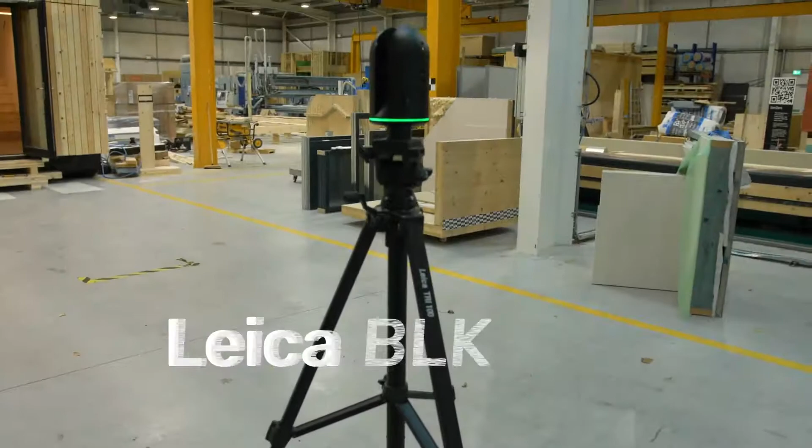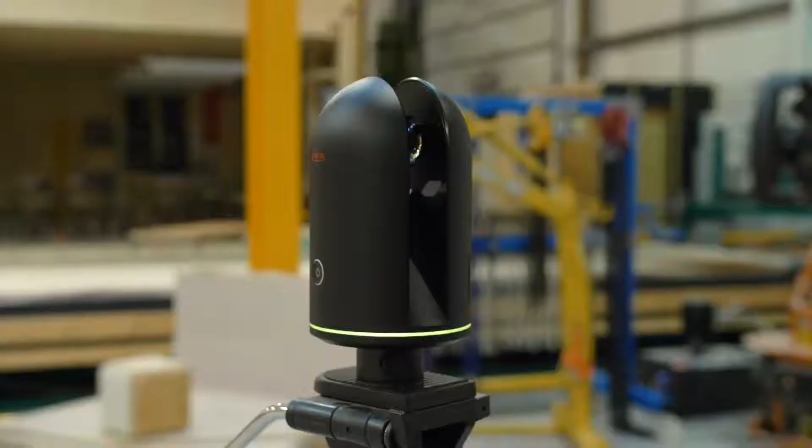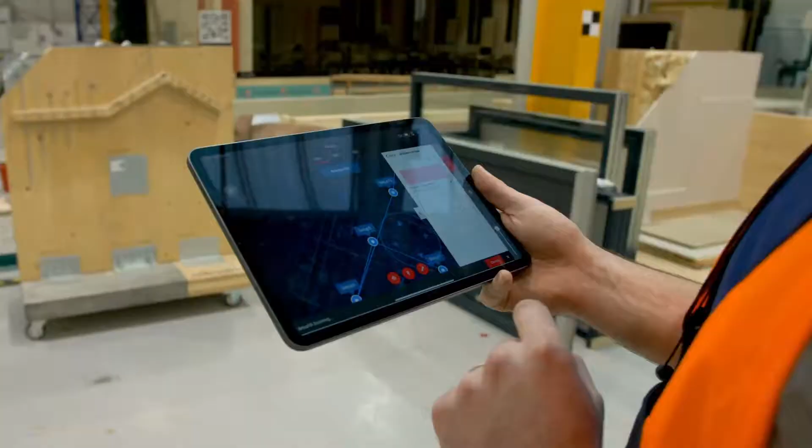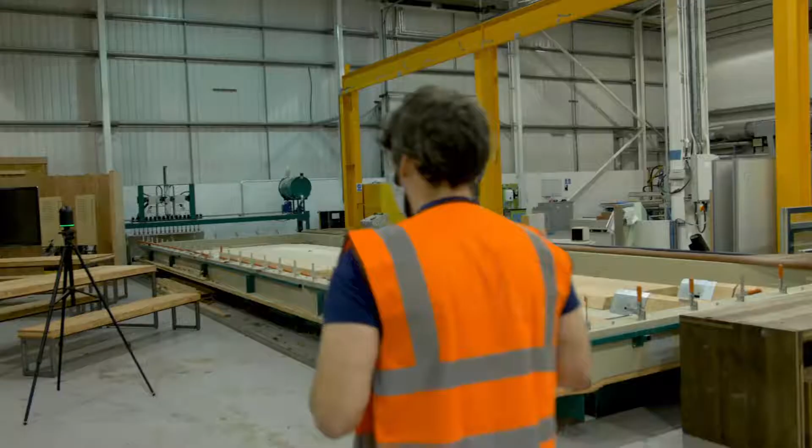The Leica BLK360 is a compact imaging laser scanner that uses a 360 laser distance meter and high-definition panoramic imaging to create a 3D point cloud of the space around it. LiDAR technology captures 360,000 points per second. 3 spherical panoramic HDR cameras with a thermal imaging camera deliver 3D point clouds with millimeter accuracy in minutes. A LiDAR scanner creates an accurate and detailed digital record of real-world space and objects. Combining this with BIM models and data, an accurate digital twin can be developed. 3D scans can be used to keep a record of in-progress work, mapping and overlaying changes as a job develops. The BLK360 is small, compact and easy to deploy on-site or in restricted spaces. Laser scanning improves quality and accuracy of site information. Scanning is also fast, efficient and cheaper than other forms of project mapping.

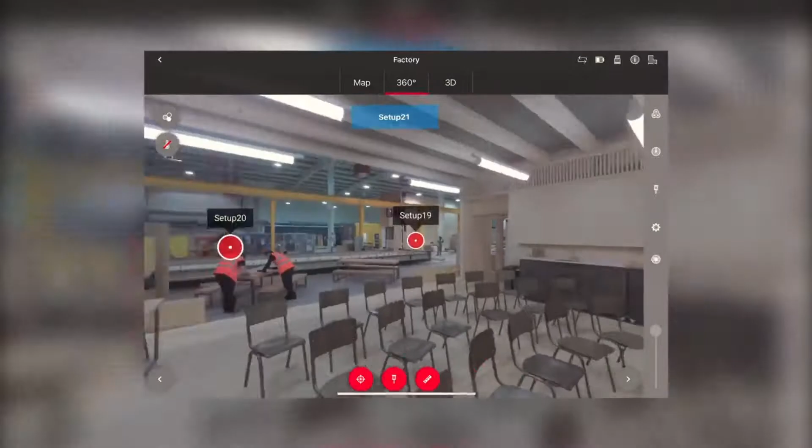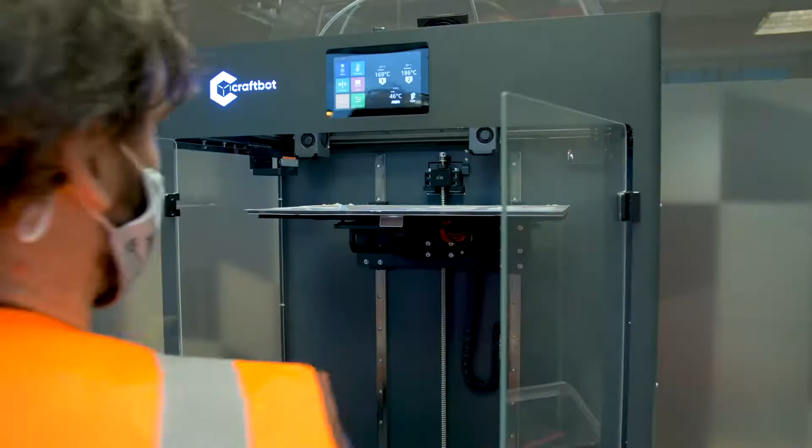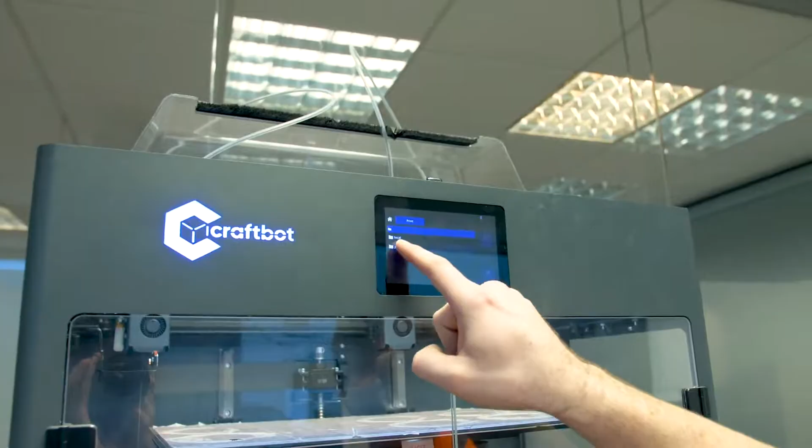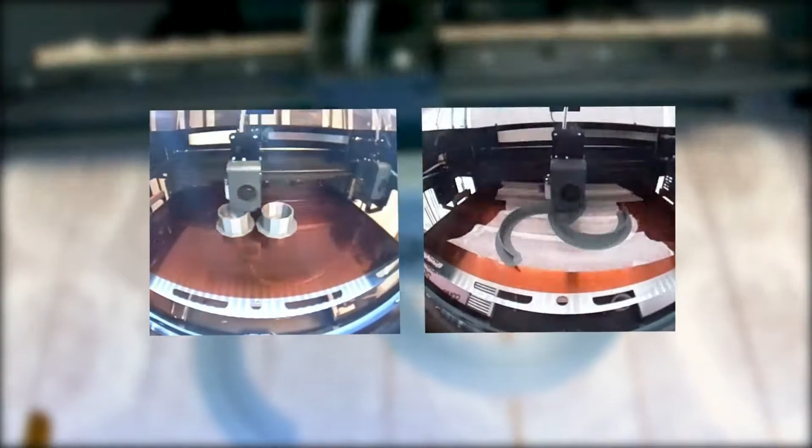The Craftbot Flow IDEX XL printer has one of the largest print volumes of its kind. Large-scale FDM printing allows quick and accurate prototyping of industrial-scale objects. IDEX technology allows reliable dual extrusion, running 2 independent print heads. 2 different materials can be preloaded to allow multi-property objects, bicolor items, or objects with PVA support. With this large volume printer, you can not only print large objects, but can also duplicate your performance by printing 2 objects at the same time, in mirror or parallel mode.

Available through the Make It Smart Hub, SMEs can access this technology to enhance their current R&D processes, test new opportunities, or create custom unique objects at point of need. This equipment was procured for and made available through the Make It Smart Hub for SMEs in the Highlands and Islands.

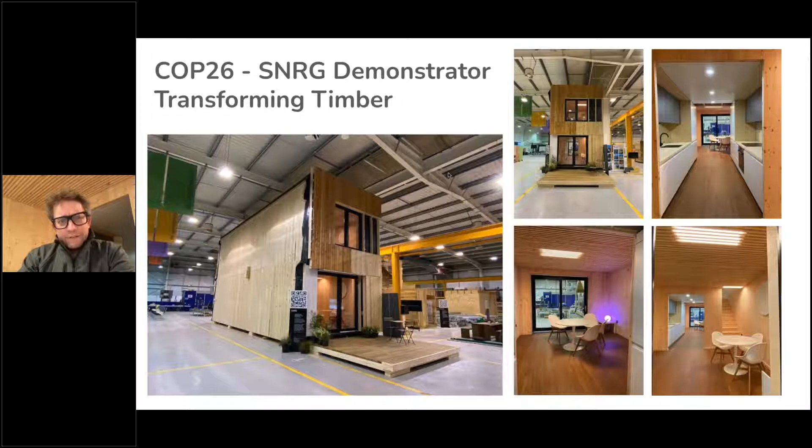If folk had the opportunity to visit the Innovation Factory during COP, they would have hopefully come via Central Station and seen the homegrown mass timber figure we produced for the Beacon of Hope. At the factory here, you would have seen the SNRG demonstrator, which I'm sat within at the moment doing this presentation. You would have seen the Gen Zero schools prototype.

Again, all of this is homegrown mass timber, the first rollout of live homegrown mass timber projects. This is a demonstrator for UK government's Department for Education for schools, which hopefully will be the way we build schools in the future, using all biogenic and healthy materials.

You'd have seen the off-grid travel hideaway cabin that we produced, and you would have seen the NearHome retrofit kit of parts project which we've done, which I'll focus on in more detail here.

So this is a project. Phase one was supported by funding from Scottish Government via Transport Scotland, provided to CSIC, who we collaborated with as lead designer on development of a near-to-home kit of parts solution for retrofit and/or new build office hub type developments.

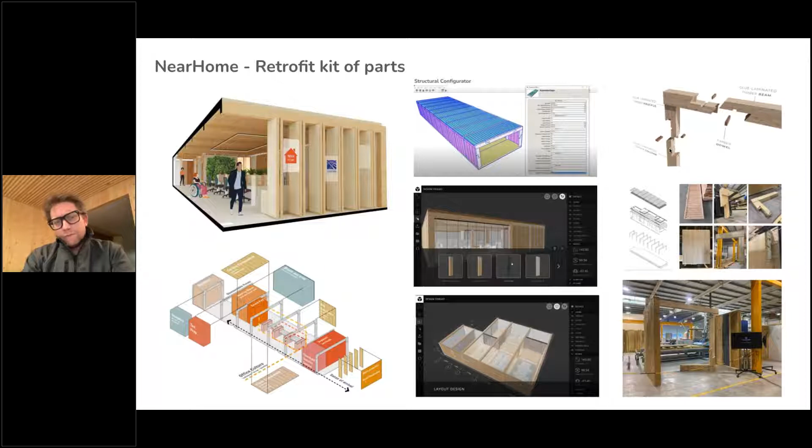We leveraged componentry which we'd established for earlier projects like this SNRG demonstrator, the glue laminated timber portal, and we evolved that as a kit of parts solution. Now what I'm going to do, and apologies, is jump around a little bit to show you a bit more of that.

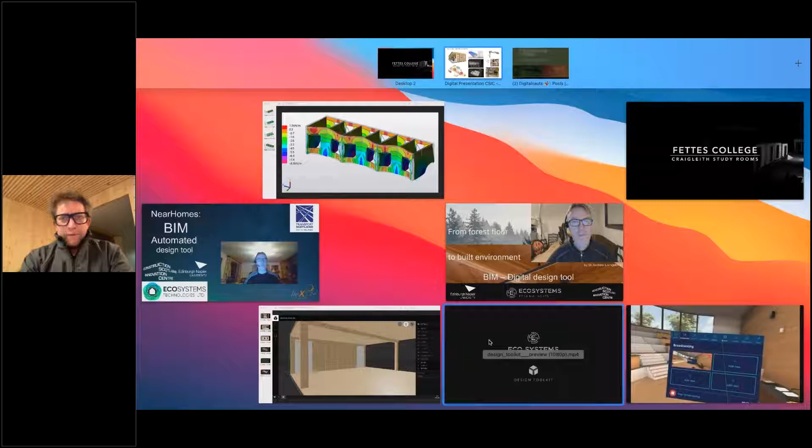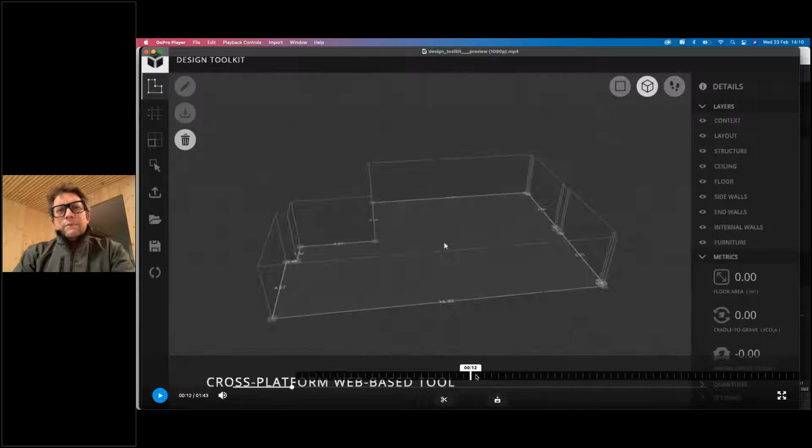So in the evolution, following on from that phase one work, we then produced a design toolkit, a kit of parts that allows us to import data from a 3D model, in this instance SketchUp, so we can import the footprint of an existing building. The design toolkit has a set of componentry that automatically self-generates elements to populate that footprint of building. We can then adjust and modify that to get the preferred configuration and grid for the project.

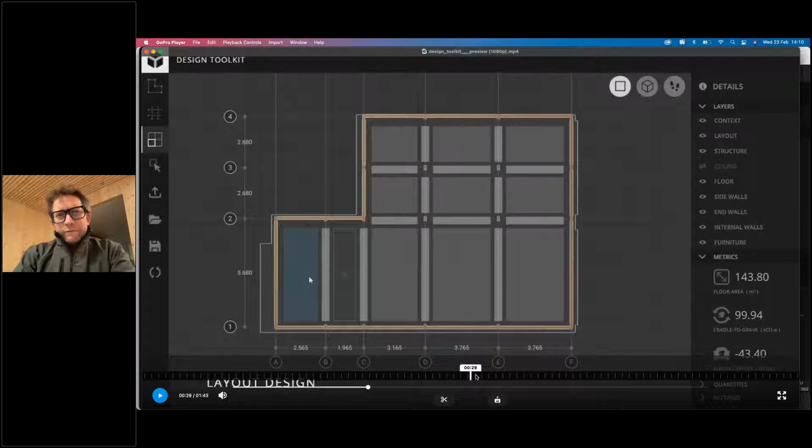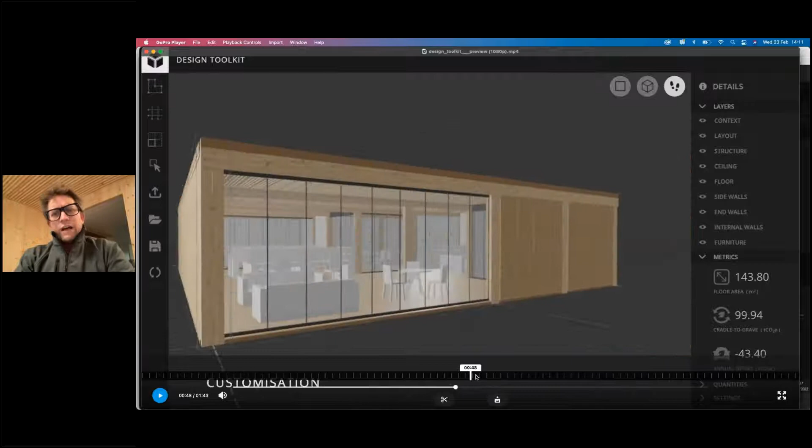We can then go through and optimize the layout and work out what the optimum configuration is for office breakout space, and so on. All of this componentry is predetermined, so nothing's designed as new elements for this. It's all stuff you're choosing from a predetermined palette of options, and you can go in within that and choose to select and alter things.

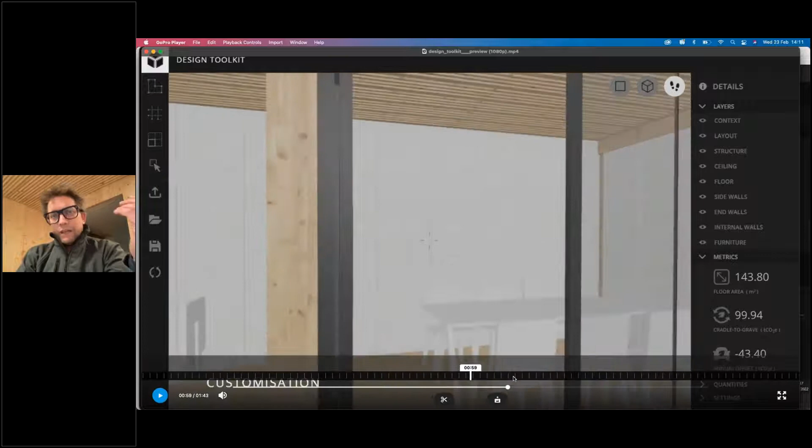We alter the wall finishes. Here we're applying a nail laminated timber wall rather than a plasterboard wall, for example. We're adding color, changing it out across the whole breadth of the project, and really going through to configure and optimize it to best meet the needs of the project.

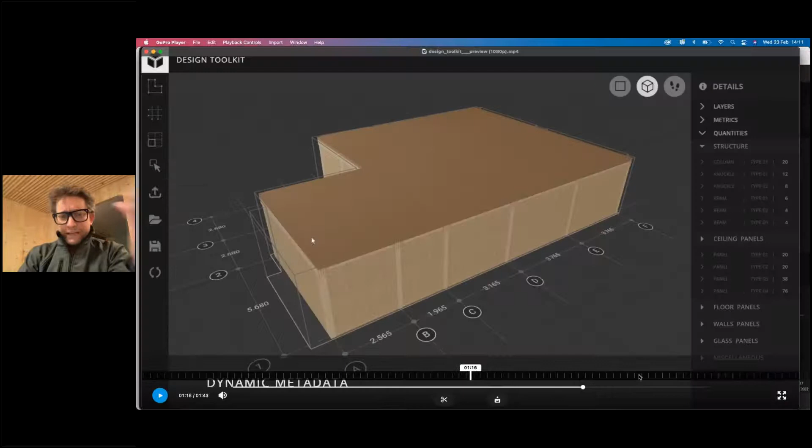What this also generates is the quantities, the carbon impact. We can bake into this all the life cycle data and so on, and then the resulting model can be dropped back into the original 3D software and adjusted further if required, becoming part of that overall overarching model. So that's the design toolkit.

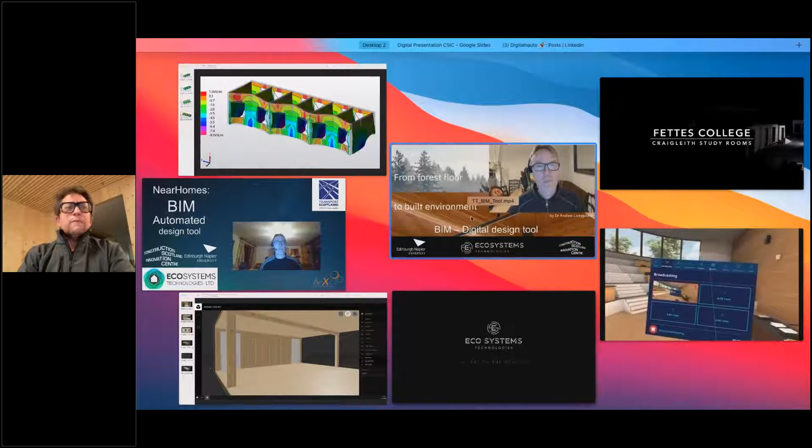Now, what that does is leverage some very effective work done by Andrew Livingstone, Dr. Andrew Livingstone from Napier. I'll just zoom through here - sorry, wrong video.

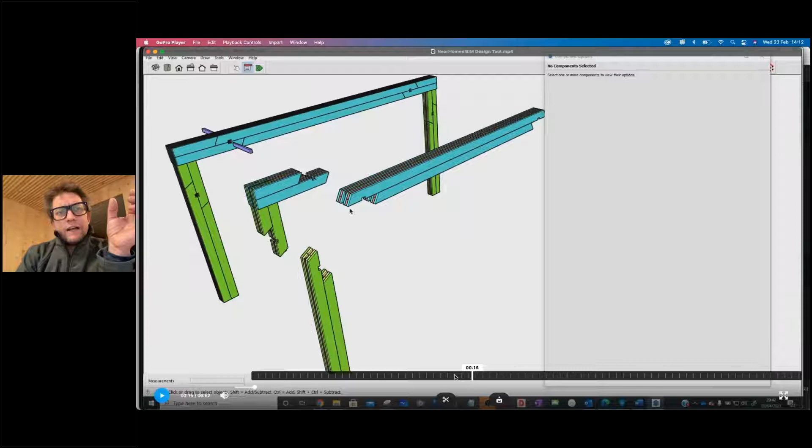What Andrew was able to do was take all the componentry and create the mathematics that sit behind the structural analysis, so we can have different layups and configurations of lamella, different sizes of portal and componentry. What it's then able to do is input all the project criteria, whether it's the height of a bay, the span of the bay, number of bays, all this key project information.

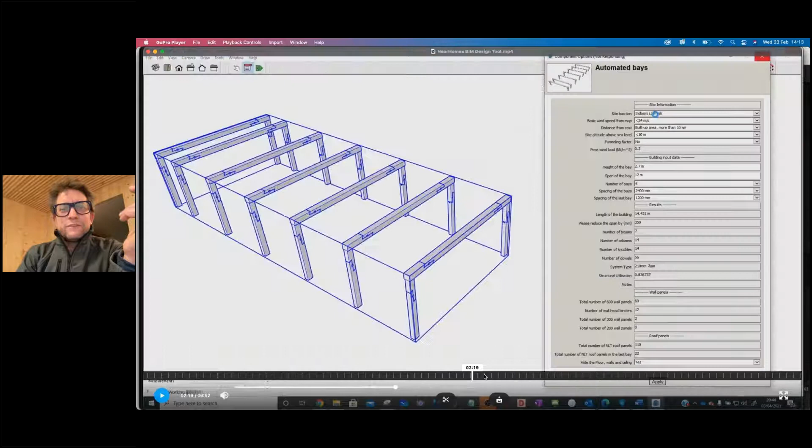I'm zooming through, so apologies if it starts getting a bit sea-sickening, but drop on this bit - we're then able to plot it geographically and work out what the wind speeds and wind loads are.

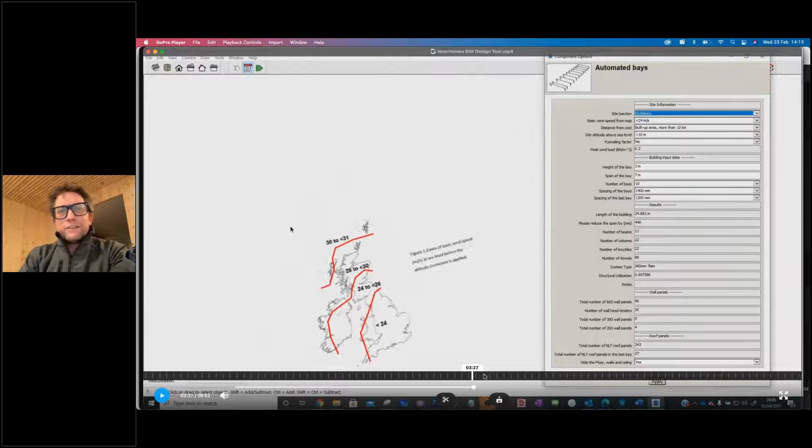When you enter that in, you can have an internal or external arrangement, and it'll adjust for the wind loadings accordingly. We can then keep stretching the parameters of what can be done. We'll get to a point showing different wind speeds, inputting criteria like location, proximity to the coast, and height. All of that continuously updates as a configurator, a structural configurator.

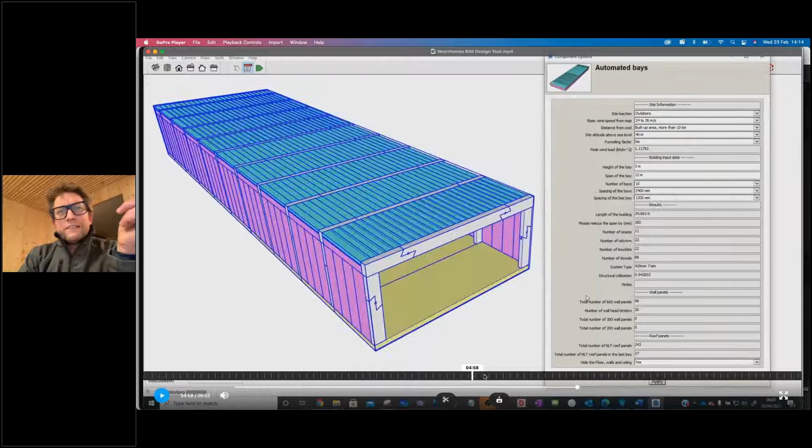We will reach points where we exceed the parameters of the system as it stands, and then we can dial back to find a point where it works. That may require us to reduce the span or increase the number of bays to get the right result. All of that computational mathematics is the back end to the configurator I showed before.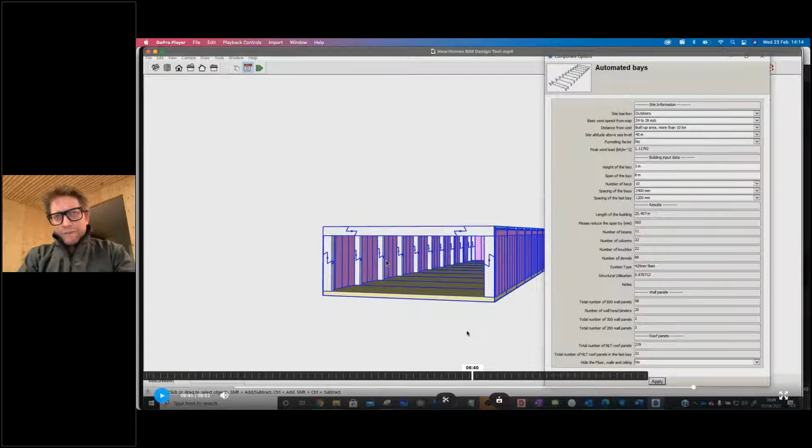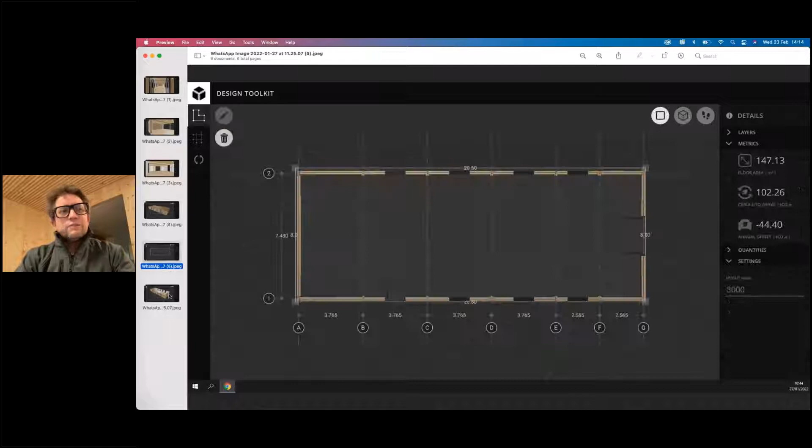Now this toolkit that we've produced, we've already started to deploy onto projects. Here are some screenshots from when we were asked to design a solution for a client who needed a 150 square meter unit. We were able to very quickly run through that and export results, and that project could move through the gears really responsively.

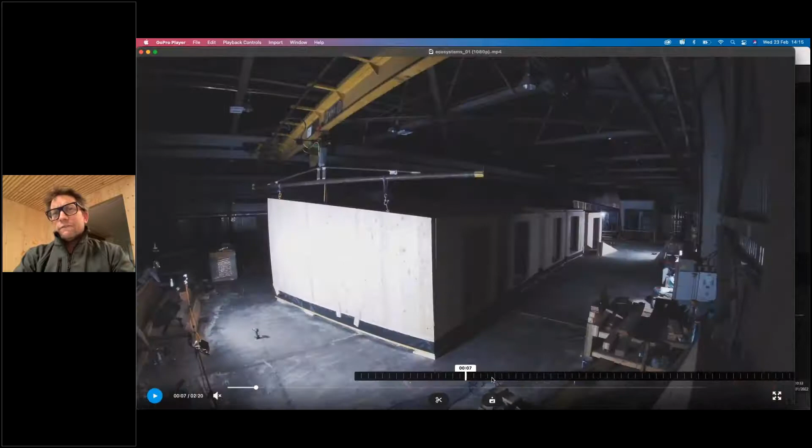Conscious of time, we've delivered a project recently, first rollout of a homegrown mass timber project for Fettes College. You can see it here getting manufactured in our factory in Invergordon. All of the mass timber componentry was manufactured down here at Blantyre at the Innovation Factory, delivered to site.

This project landed onto piers, and through the course of delivering it we found extra services on the site and all manner of structural challenges that were leveraged into the project, meaning we had to keep adjusting the configuration and design. Here's the finished project, but we had to be very agile in responding to changing parameters.

We've got a very live process going on at the moment where all of the information you'd have had a glimpse of in Dr. Andrew Livingston's previous presentation is now feeding into a design toolkit which does all the structural analysis, and creates a mesh for the entire structure.

It has inputted all of the characteristics of our homegrown structural products - cross-laminated, glue-laminated, nail-laminated timber, and glue-laminated timber portals. All of that information resides within the software, meaning we can now create very optimized solutions.

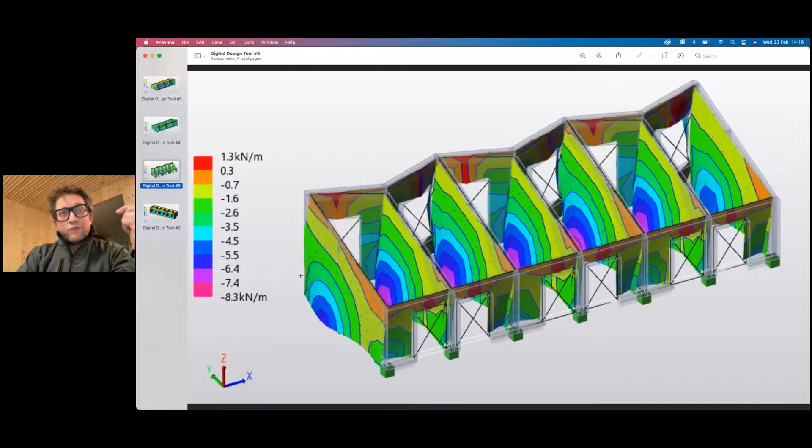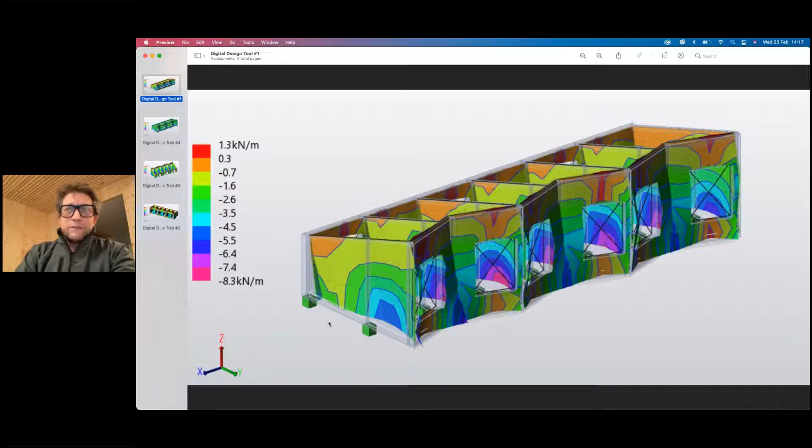What it vitally means is that if we need to change characteristics or parameters, we can do that in a very live fashion to optimize, either because it's essential or because we see an opportunity to do so. Often in a project timeline we've been held back from doing that because the design time would be prohibitive, either in time or cost. There's a whole other set of BIM tools Andrew's evolved so we can be parametric in our approach, but I haven't got time to delve into that.

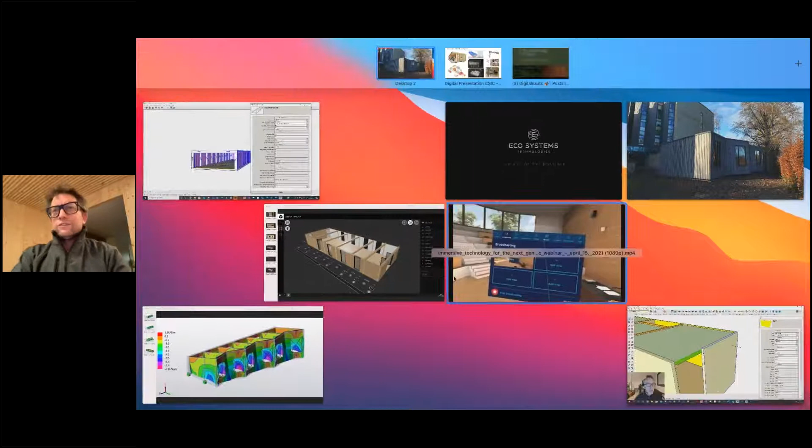What I would really like to do is give you a sneak preview of some of the other work we're doing in terms of dissemination. Dissemination is crucial to us and the work that we're doing.

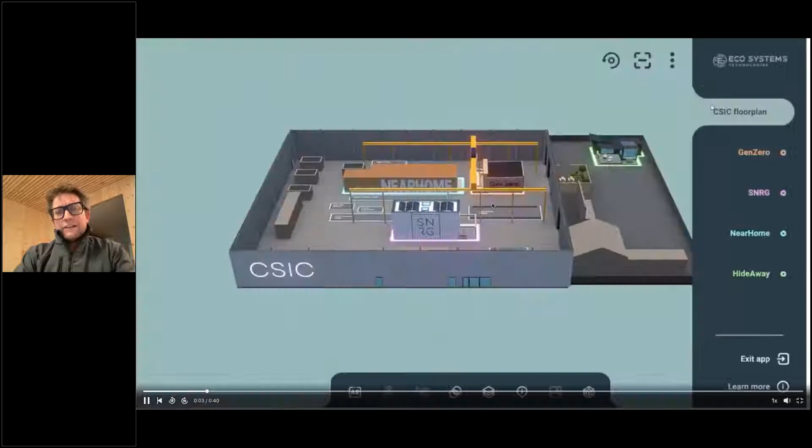Here you can see we took a scan of the factory floor at CSIC, the LiDAR scan that Matt showcased before. We've now got a full artifact of the presentation - this is an export from our 3D model. We have the ability to interrogate and understand projects, to have hotspots, to delve into this in more and more detail.

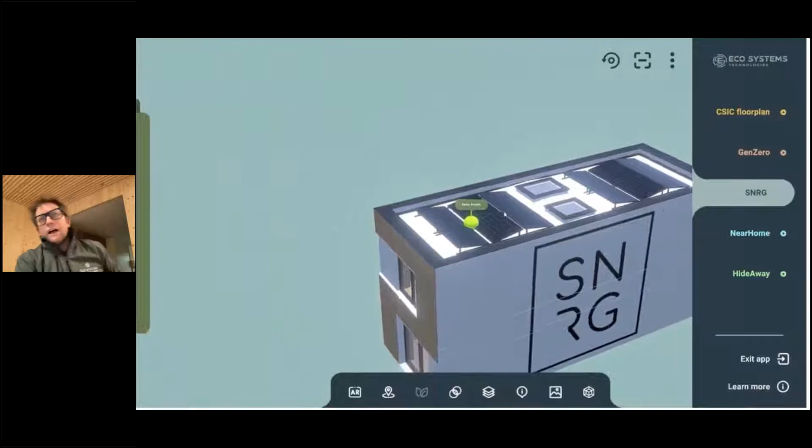It would be a resource that allows people to have an active interest in the projects that we're delivering. I'm going to nip out of that and give you

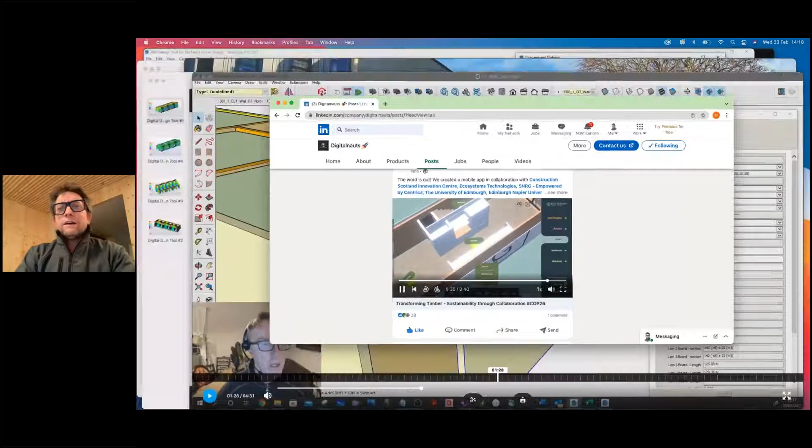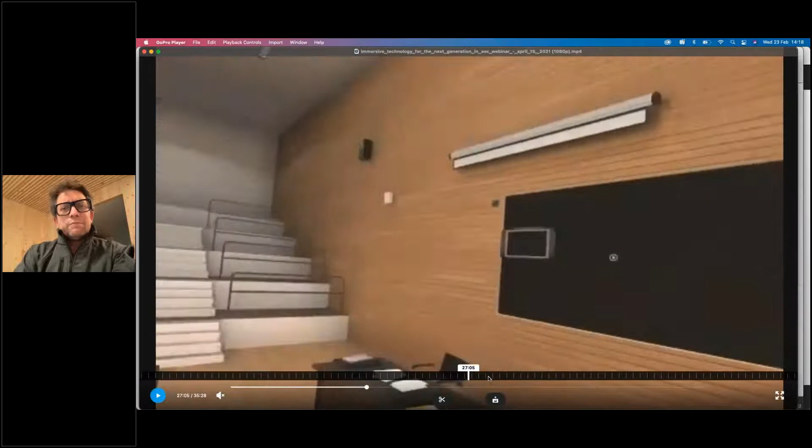an idea of how that could look from an augmented reality and virtual reality perspective. This is work done by another collaborator - the previous work was Digitalnauts, this is Edify, who have a digital education platform. We can actually drop live content from projects into this as a resource and allow people to interrogate it.

In the past we would have had to create animations such as this one. Now we can actually delve into and see the projects, all of the rich content that comes from the delivery of one of our projects.

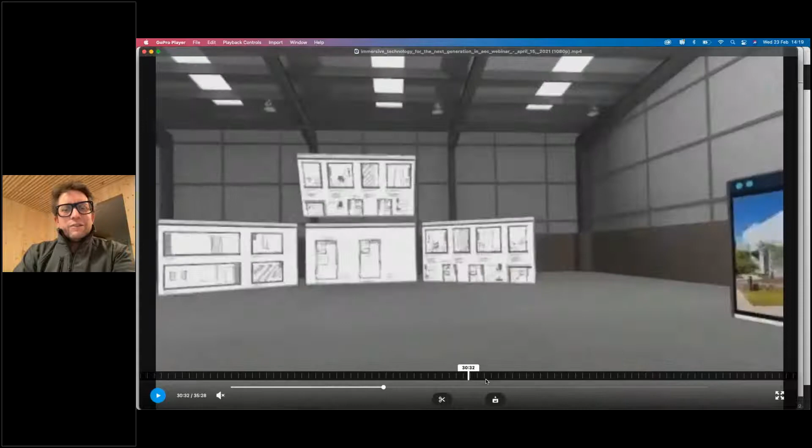So here you can see very live cross sections of a build. If I zoom forward again without making everyone too sick, we can go into a virtual environment. So we're going to establish a virtual knowledge library where people can go in and really interrogate the data, the content that sits behind the project.

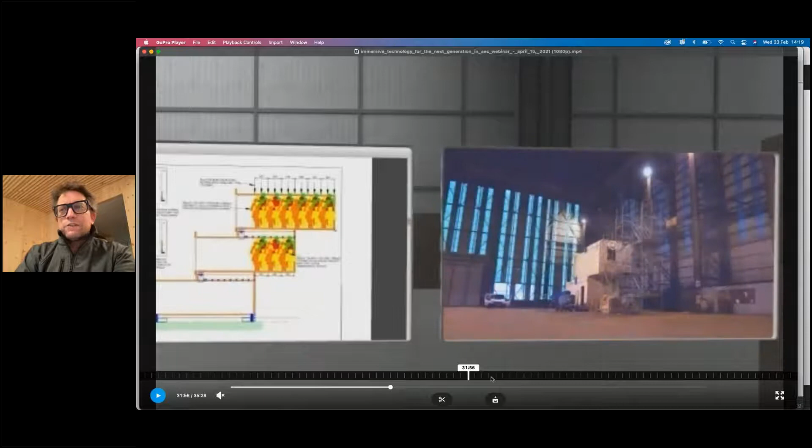So here, if somebody wants to see and analyze the structural reporting and calculations that went into the creation of a project, they can see it here. The reports on the left-hand side, the physical prototyping is in a video on the right-hand side.

We can delve further in and see that cross-section of a building. We can align that with a drawing and understand very tangibly what that means. I think I'm running over time, so I'm going to zoom forwards further.

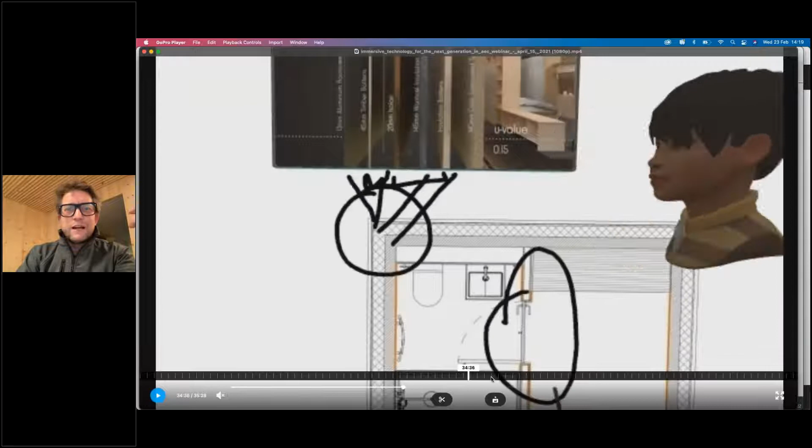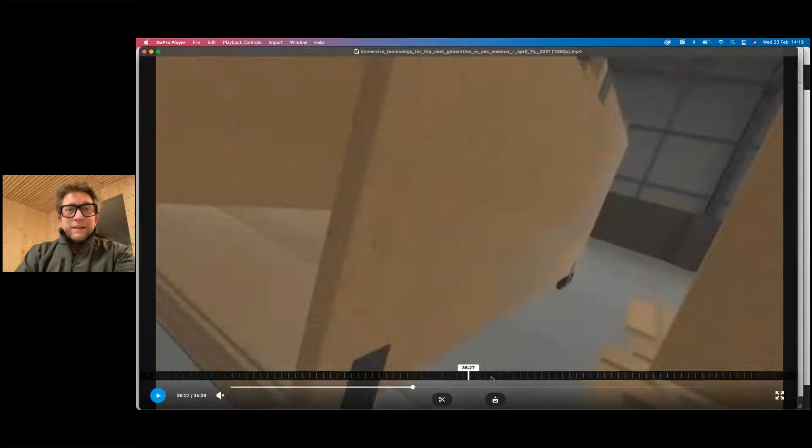We can mark it up, we can use it as a live tool, and we can actually do a walkthrough of the process of manufacture and really sort of give visibility and clarity and remove all obstacles to understanding the manufacturing process.

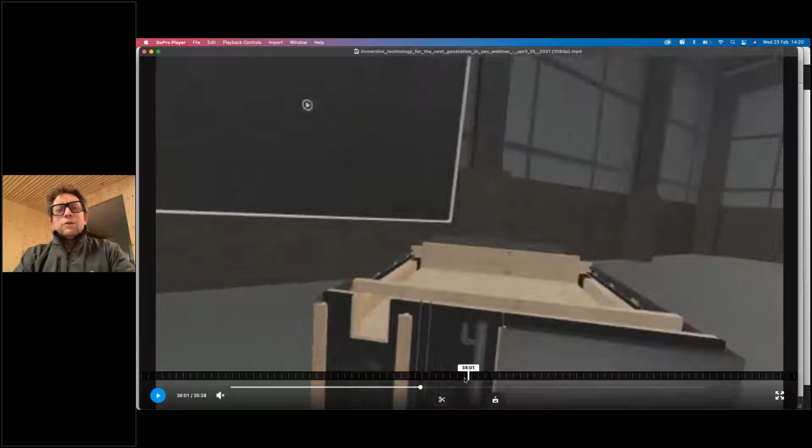We want to make this a tool and a repository of information that captures all of the rich data that exists from the marketplace, from the industry, all of the work that's been delivered over time by all the different stakeholders who we collaborate with, can be captured within this and made available for students, for the next generation coming through, to really understand and facilitate them specifying mass timber, biogenic based materials, and so on and so forth.

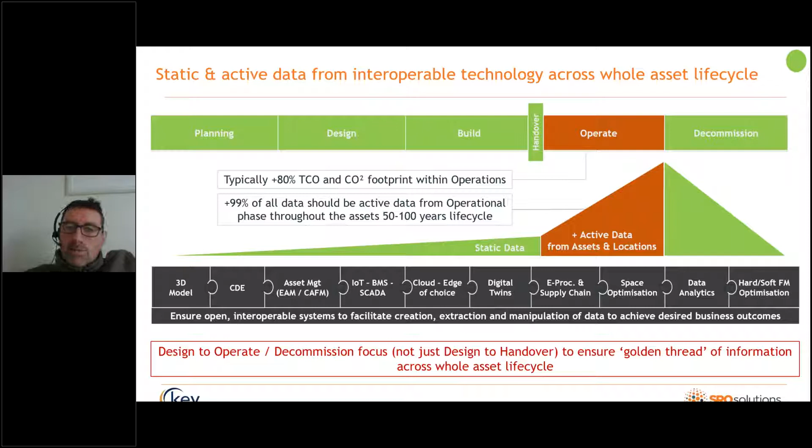What we're avoiding is trying to paint everything a single color. I won't mention names, but there are some big organizations out there that will tell you they can cover whole asset lifecycle requirements, but the problem is their solutions are more often than not proprietary, closed, that walled garden, locking the customer in. What we're seeing is clients and government, as it says in red there, pushing for key principles where the AEC market needs to go for open, modular, best-in-class, value-for-money type solutions. What you're seeing in the center there.

Otherwise, they're not being considered. So we're being forced to change from government, and we're going to see more and more of those key principles being imposed by the client as well.

Well, as I said up front, we recognize we can't do this on our own. We're good at some of that end-to-end piece, so we're good at asset management. That's what SRO solutions are good at. But this needs to be about collaboration.

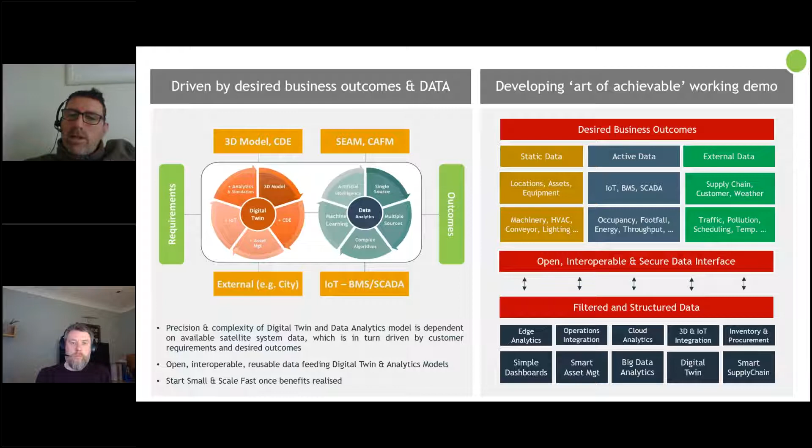Gordon, over to you. Thanks, Paul. Hi, everyone. Glad to be here.

So really flowing from what you heard from Matt in the construction considerations through to Paul and assets and the operational phase technology, where I focus is very much on how to apply all the data being generated from these worlds and then operate and function with them through to end user experience.

As Paul mentioned, this golden thread is carried through data. In essence, these points are about how do we take this flood of data coming into our built environment now and start to make use of it, rendering it both real time and over longer processes, considering how we apply just enough data to typically stretched operational teams to make informed decisions without flooding those operations with millions of points of data that they just don't need to see or have row-to-row exposure of.

This comes into, as Paul's mentioned, a much more holistic approach where we need all the schemas, the naming, the BIM models as a foundation to work with, but applying it to the end operation, that service component, getting into things like the scope 3 emissions.

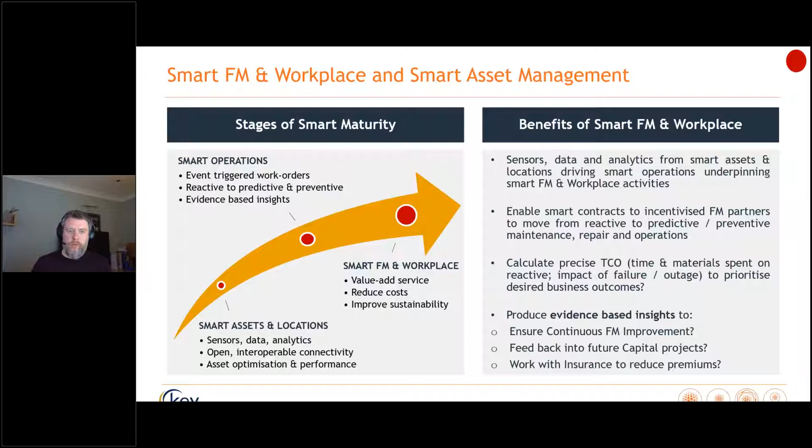But I think what Scotland's done with some of the work that CSIC's certainly been leading is looking at, again, how do we take all of this and start to apply it to more value, both environmental, sustainable, but also societal.

So that walks into something where, if we can understand the built environment, if we can understand how to operate it, we can then start to take these smart buildings into much more user-centric positions.

But understanding that it's environmental, understanding my health and well-being and my safety is being taken care of, things like that are obviously how we associate with our places and spaces.

So in this regard, what the Centre for Digital Built Britain started to lay the foundations of, but where Construction Scotland Innovation Centre and the Scottish Futures Trust are starting to pioneer and push out, is how do we take all of that and apply it to our places and spaces to come up with these smart hospitals, smart schools, smart corporate real estate, whatever the end usage might look like.

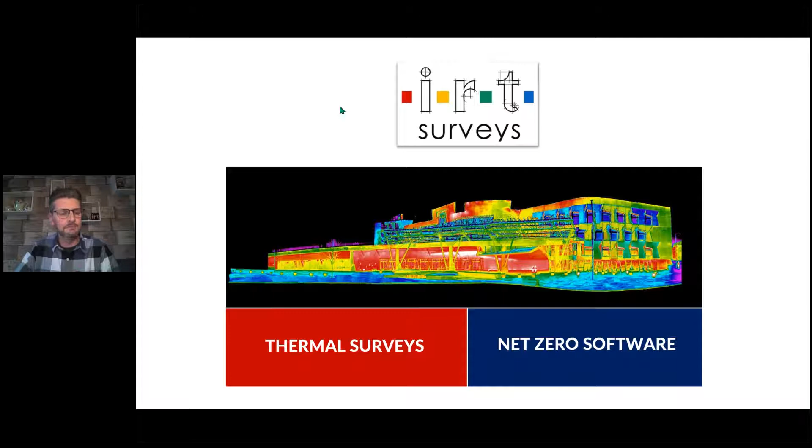Bearing that in mind, I'll walk you through what we do with those images. Our mission has grown as the company and the market have matured. Our mission now is to identify houses that need to be fixed, plan what needs to be done in a data-driven, solution-agnostic manner, fund that retrofit—we've got access to over £7 billion to actually fund it—and then work with supply chain partners to implement the retrofits themselves.

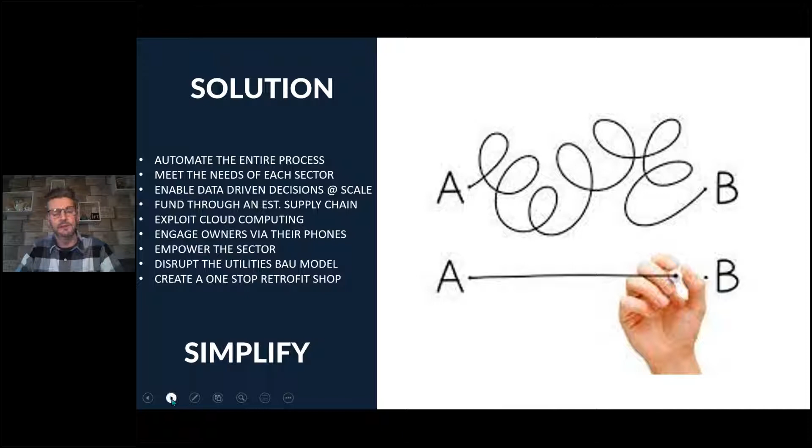Most of our clients, because the market is so fluid, the funding landscape's fluid, things like SAP keep changing, EPC keeps changing, more products come onto the market. People generally get into this analysis paralysis mindset where they're so confused they end up not doing anything. So we're trying to solve that by using a data-driven, pragmatic approach to simplify the whole net zero journey and make it affordable. Thermal imaging fits into that, which I'll explain in a second.

So I'm a very simple person, I like to talk in small, easy words where I possibly can. But if you imagine buildings as leaky buckets and energy as the water going into the bucket, there's very little point in sticking your finger in one hole, because you just increase the pressure on the other holes and energy flows out the other ones. So we're very much into a fabric-first approach: do everything you possibly can, and then introduce renewable energy into the solution.

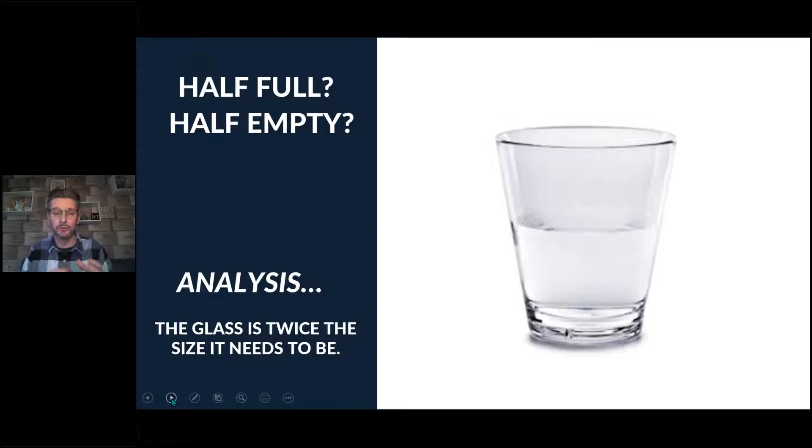The point of data: you can be an optimist and say the glass is half full, you can be pessimistic and say the glass is half empty, but if you analyse the data, you learn that the glass is actually twice as big as it needs to be. That gets a wee giggle sometimes in a live audience, but it's very true. It's about making sure you understand the problem and design the solution to actually fit and meet the needs of the project.

So we've been doing thermal imaging since 2002. We started doing software development in 2006. We launched various bits of software in 2009 and 2012. About 2017, we brought out a platform called DREAM, the Dynamic Retrofit Energy and Asset Management Platform.

As the previous speaker said, you do need dynamic information, ongoing consumption data to make meaningful decisions. In our view, the whole net zero journey is about working out where you are today—that's vital. You can't start the journey unless you understand where you are. So let's get your data into shape, agree a destination, and then optimize the route, exactly the way SatNav works in your car.

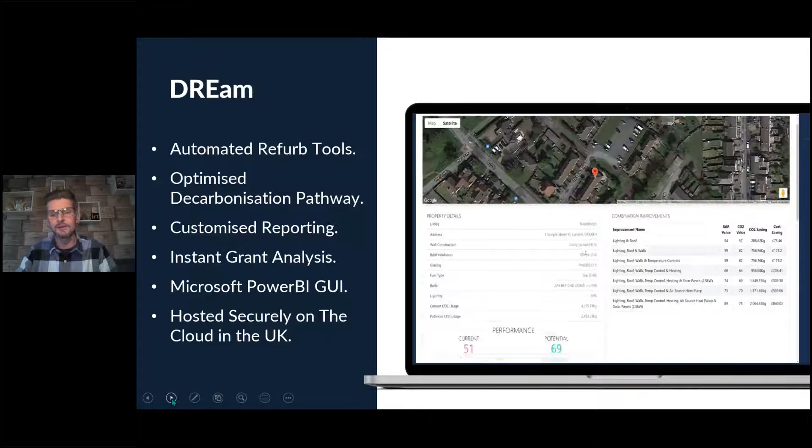So we've written this DREAM software that basically pulls in all sorts of data from your asset register, from the EPC register, from the Royal Mail, from Google, puts it all in one place, aggregates it, sanity checks it, and then creates an individual roadmap for each individual house within your portfolio.

So if you're, say, Inverness Council, you can put the entire city of Inverness into this platform, and then say, just show me people living in fuel poverty areas, areas of deprivation, show me people on the gas grid network or outwith it, and literally draw a polygon around it and create a group—that's our target. This is step one of how we get to net zero. We can then analyze that subset and tell you which houses qualify for grant funding and help you leverage as much funding as possible.

Thermal imaging comes into play quite critically at this point, because no one's data is accurate at the moment. I did smile, Gordon, when you said Europe's the most advanced, but we're only about 1% into the journey. Of that 1%, I wonder how good their data really is, because it's very much in its infancy. Thermal imaging is a really good way to check when the data says, look, that house is perfect, the cavities have been insulated 5 years ago.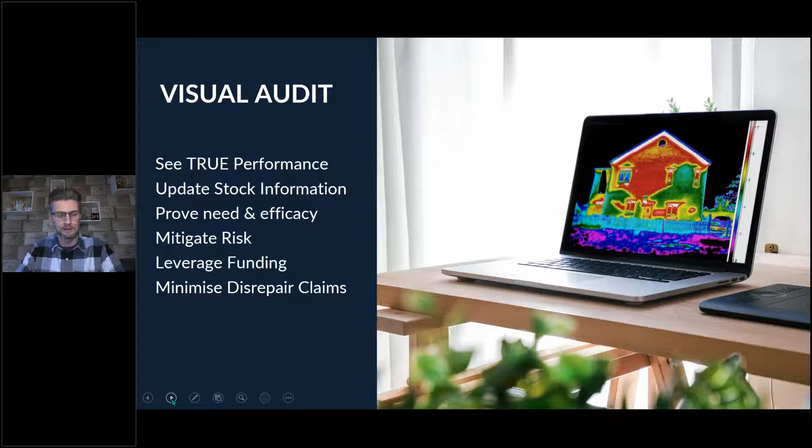In 2006, we wrote software that can literally turn pixels into pounds. So we can show you an after refurb on the left, before on the right, and then engage with the actual tenant or homeowner.

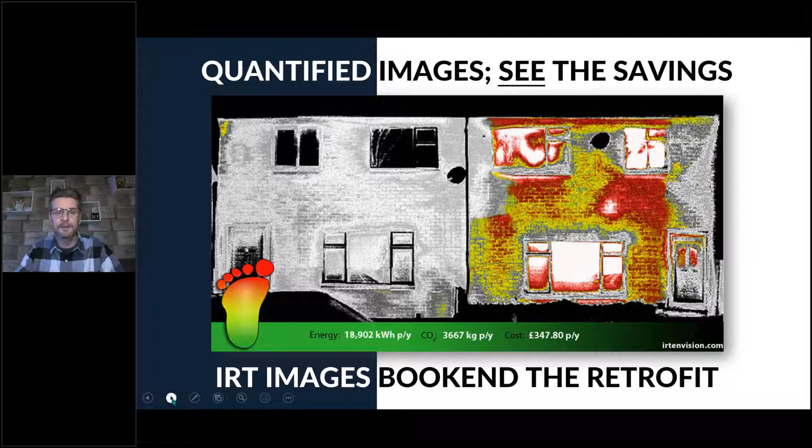I think my teenagers would call it FOMO, the fear of missing out, and that's a really compelling thing for people. They like to know they're at least keeping up with the Joneses. So we have drones in the sky doing high-rise buildings, and we're working with various partners on Google Street View style vehicles that can drive around electrically, in EVs.

So in that 3D world, we've rendered buildings with their energy performance and embedded net zero roadmaps into each map. You can download it and use it as a sat nav, and we can make your phone vibrate if you drive past a house that qualifies for funding. It's a very cool, easy, cheap way to engage the public in the need for net zero.

Drones maybe aren't super needed in Inverness, since a lot of buildings aren't above 4 or 5 stories, but if you've got buildings that are 15 or 16 stories, drones are a fantastic way to do surveys, and a superb, easy way to do big flat roof surveys.

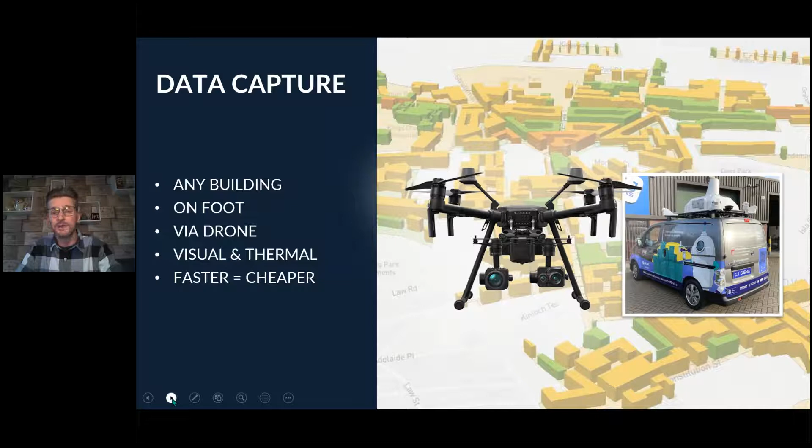Quick case study of what's actually out there right now. We're in Aberdeen, live on a project where we put 22,000 houses into DREam. We created a little consortium and got funding from BEIS.

We selected about 4 lots of 500 houses that needed retrofitting and met BEIS funding criteria. They were EPC failures. We then engaged with the tenants and thermal imaged them. About 150 people said yes, please, I really want a retrofit. And we did various surveys to assess what would be right for each individual house.

This little screenshot is mainly for people south of the border, in case they don't know where Aberdeen is. That's basically a £5.5 million project, and half of that funding came from private equity. So there is plenty of money out there to fund these projects, but capital at scale needs a robust and mature market to deploy it at scale.

And that's what we're working on - trying to say that we've got the tech and software to join up the need with the funders and put it all in a dynamic platform that's nice and easy.

So, toward the end now, we basically put data in the top of the funnel into DREam. Then we do a funding analysis. Once we've cleansed, mapped and modeled all the data, we put it through to see how much money you can get for free, what grant and funding is available to help.

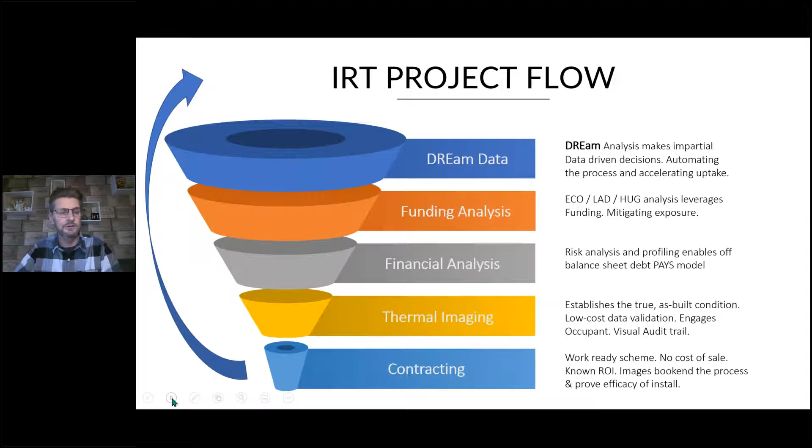And we just keep doing it again and again until we hit net zero. That is the plan. That's my last slide. Thank you very much.

Did I get you back on schedule, Sarah? That's a few times I've heard you speak, and every time you do, I'm just amazed at the way it weaves together finance, because if you're thinking about retrofit, that's what you need to think about. People are worried about funding, but it's a fantastic example of digital tech being used to solve big problems like net zero. I might have a project in mind, so I'll pick up with you later.